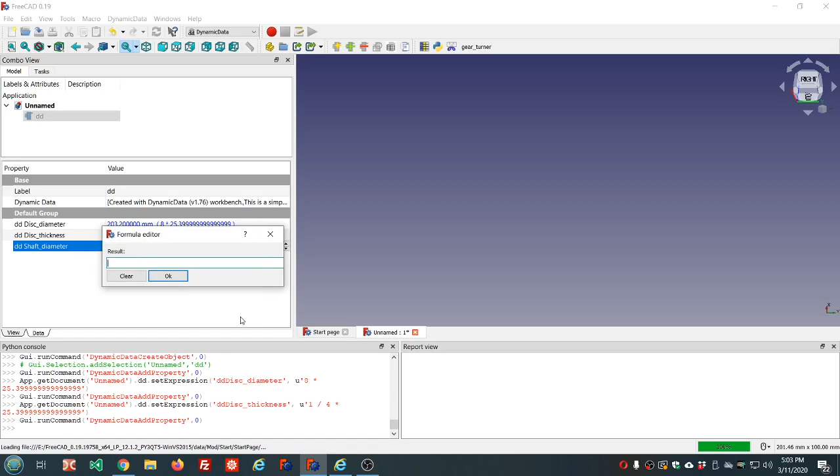So I'm going to call that the shaft diameter. That's another length type property. Let's just call that shaft diameter. And this will be, let's just use 1 inch for that.

Now we're going to go to Part Design. We can do this in different workbenches, but since I've been teaching Part Design here lately, we'll do it in Part Design. So I'm going to create a new sketch, which also creates a new body. We'll put it on the XY plane, and we'll draw some circles in it. The first circle is going to be the outer diameter, and we'll constrain that diameter. dd.dd, this diameter.

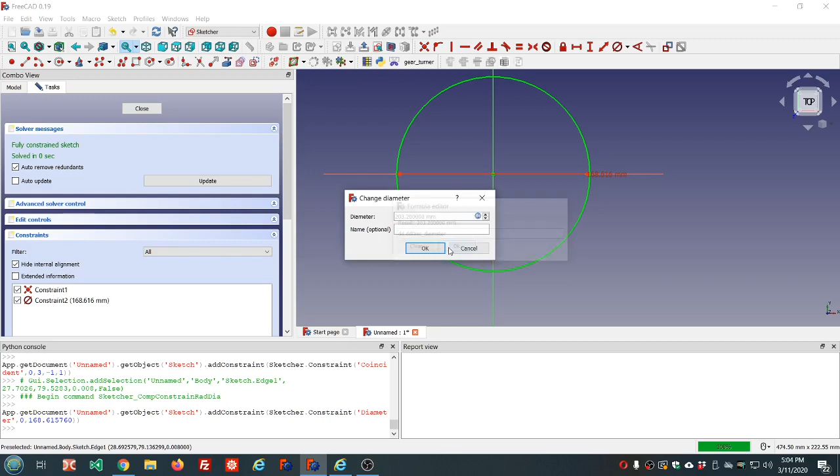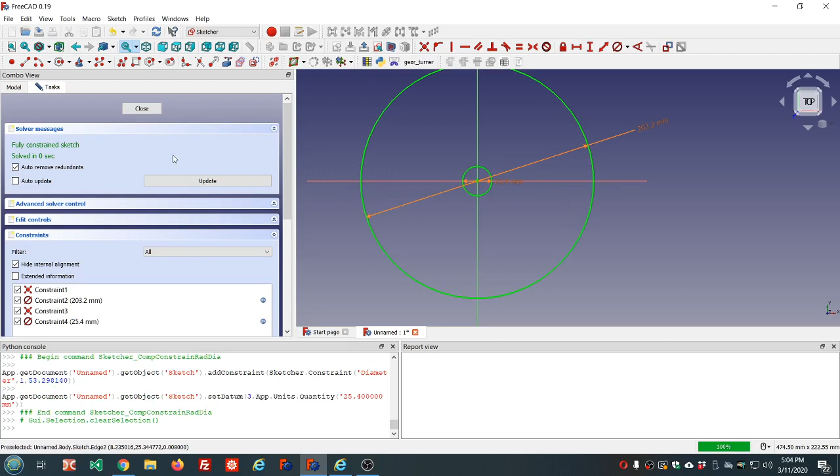Alright, and we need another hole for the shaft, a circle for the shaft, and this is going to be the shaft diameter. So that's the disc. And we're going to pad that to the disc thickness.

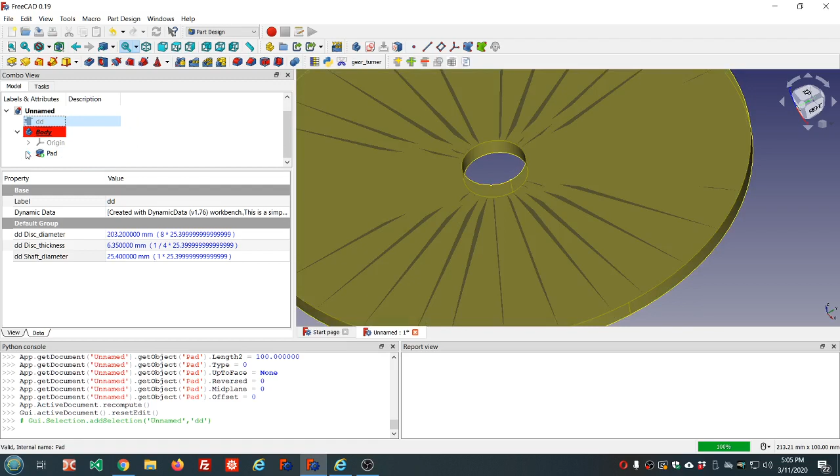So that's the basic outline of that disc. Your shaft diameter will probably be different, and you don't make any change to the sketch. Don't fool with that. Just make your change here. If you want a different shaft diameter, let's say you want 1.5 inches, let's put a parenthesis in here, 1 + 1/2, like that. And now watch this hole when I refresh here. So this is parametric.

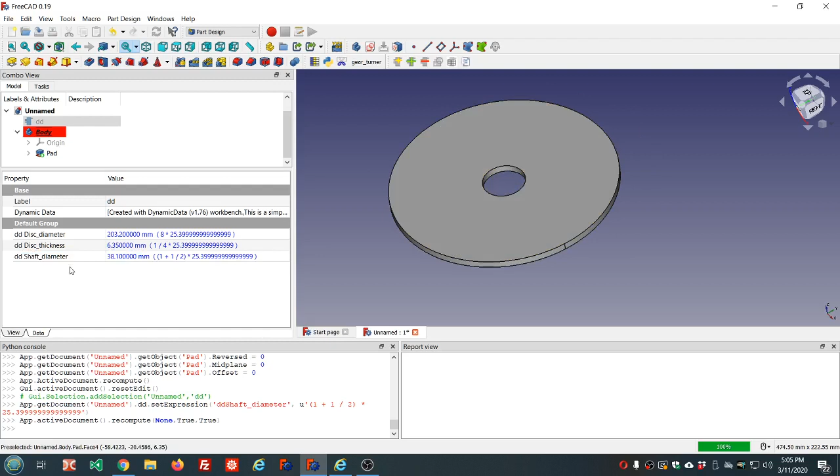Now we need also these mounting holes. Let's go back to these holes here. These holes are mounted to the rotary table. And we need to know how big those holes are, the radius. We need to know how many of them. Is it a 3-hole pattern or 4-hole pattern? And we need to know how far from the center will be the center of those holes.

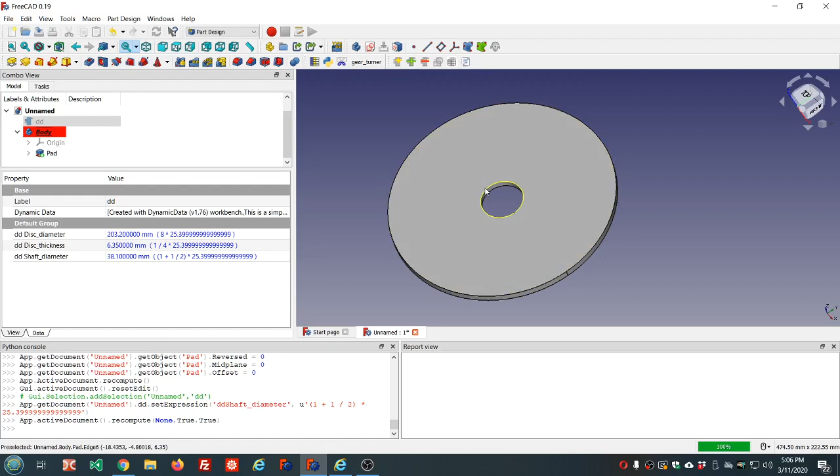So I'm going to call this the mounting holes, and the first one will be mounting hole diameter. That's the diameter of each mounting hole. Let's add another one. This is going to be a radius. We'll call this mounting ring radius. This is going to be the distance from the center to the center of one of those holes.

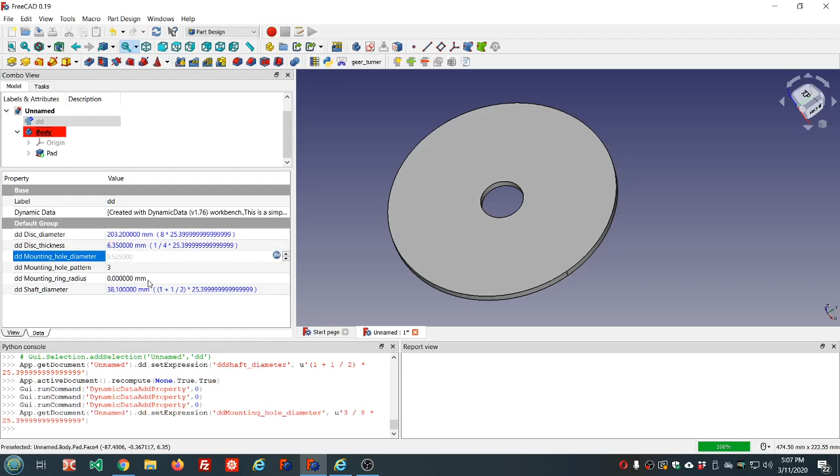And we need to know how many holes to make. So this is going to be an integer type property, and this will be mounting hole pattern, which is going to be 3, but it could be 4. You could change it here. So mounting hole diameter, I'm going to make these what seems reasonable, 3/8 inch. And the ring radius, I'm going to put that at 2 inches. We'll see what it looks like, and we'll adjust it to make it kind of look close to what we need.

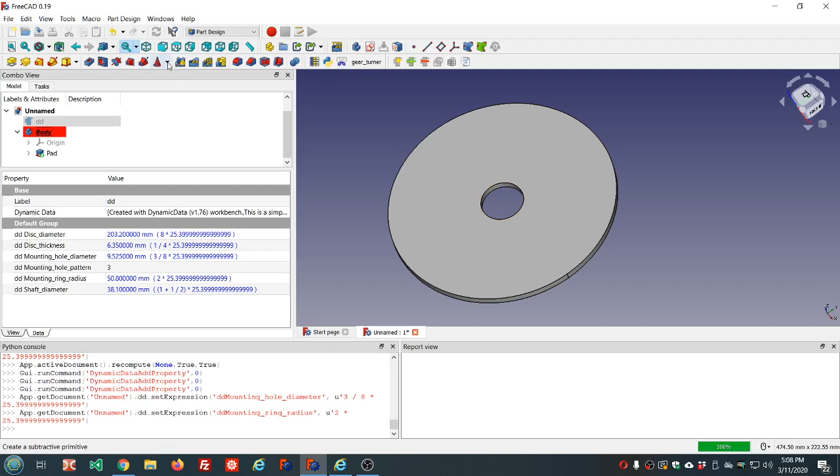So let's go ahead now, and we're not going to counterbore them just yet. We're going to go ahead and make these holes first. So we'll use a subtractive cylinder for that. The red denotes where that cylinder is at currently, and we're going to attach that to the XY plane. See that? And we're going to move it in the X direction by, what do we call this? The mounting ring radius. It looks like 2 inches, a little bit too far, so we'll need to adjust that.

I don't have Mr. Pete's actual numbers that he used. And I don't have access to the expression engine. Notice we don't have the little round blue icon here. So I'm just going to accept these defaults and then change it in the properties. Click on it here in the tree. And we're going to choose the radius here. And what did we call that? Mounting hole diameter divided by 2, since that's a diameter and this is a radius entry here. We don't have diameter as an option here yet. We don't need it.

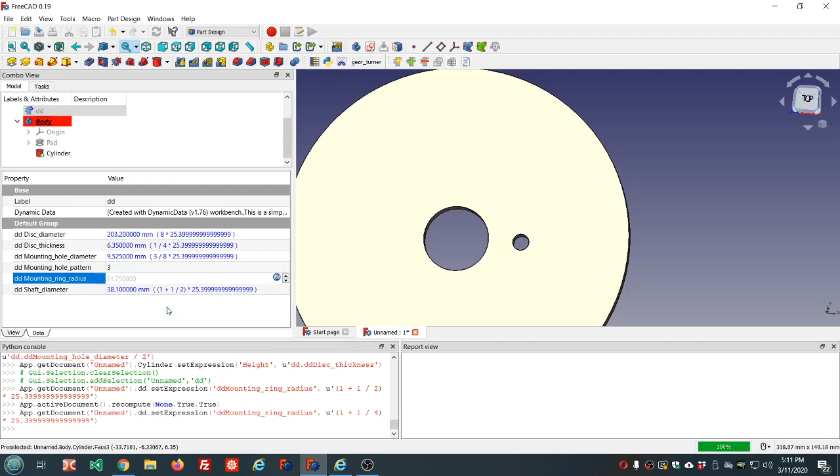So let's make that 1 + 1/2 and see what that looks like. And watch when I refresh. Is that a little bit better? Not quite there yet. One and a quarter maybe. Refresh that. Yeah, that looks good.

So now let's go ahead and create the hole pattern for this. Just select the cylinder and choose this, create a polar pattern feature. And this is going to be 3. But we want to reference this property and not just put 3 in here. That way, if we decide to change it later, if you need a 4-hole pattern on yours, you'll be able to come here and just change this to 4. So watch when I change that to 4. Now I have a 4-hole pattern. So we're going to put that at 3.

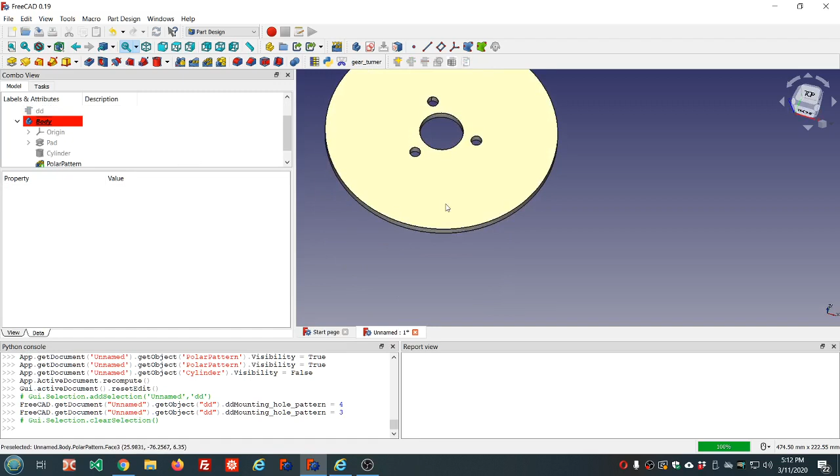So now we need to counterbore these. Now you might elect not to and just drill these and counterbore them yourself. Just put you some real small holes here as a pilot hole. But we are going to go ahead and counterbore them while we're at it. So what do we need to know about the counterbore? What are our variables that we're going to need for that?

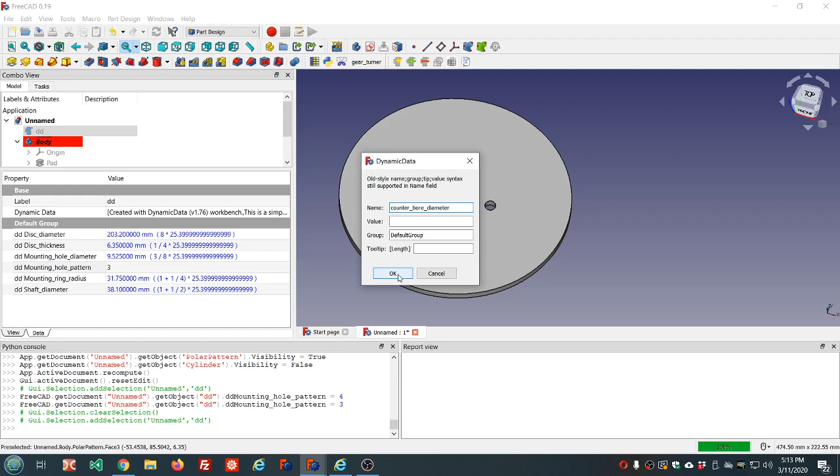Well, how big is the diameter of the counterbore? That's one thing we'll need to know. And that'll be a length property. And I'm going to call that counterbore diameter. So the counterbore diameter, in this particular case, we're using 3/8 inch holes. So I'm going to make this 5/8 inch.

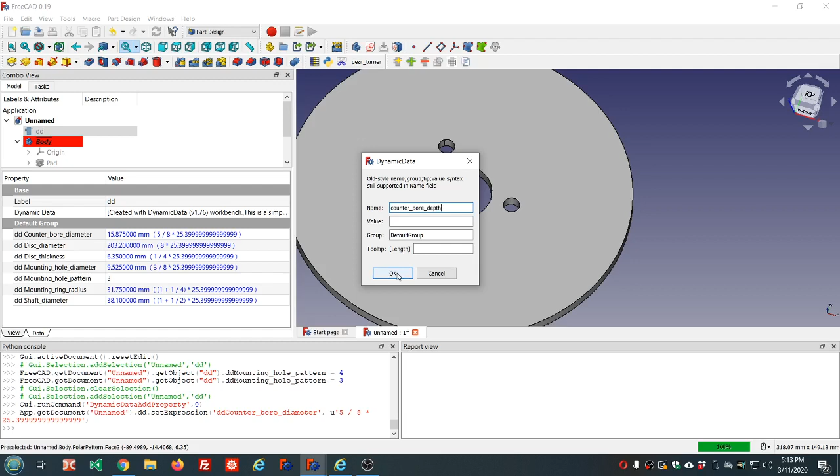Of course, it'll depend on what you need for yours. And how far down does the counterbore go? Does it go like halfway down? That seems reasonable. So we'll have another property, and I'm going to call that one counterbore depth. And that'll be this thickness. I'm going to divide that by 3, so we'll go 1/3 of the way down. That's how I'm going to do this.

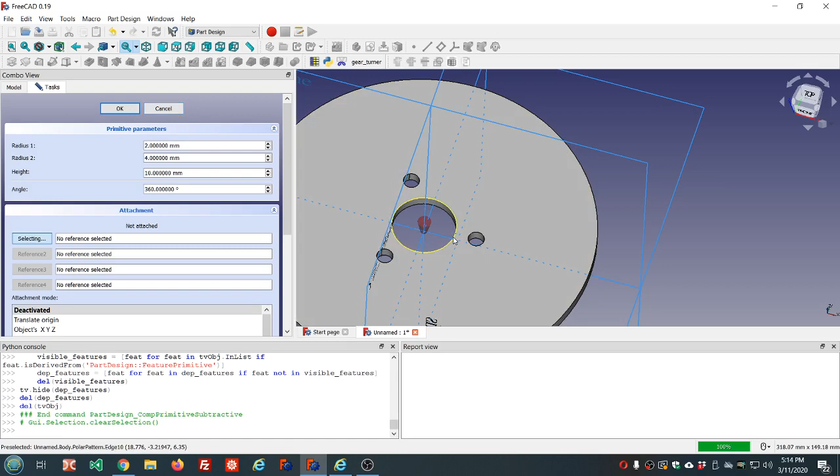Alright, and now we're ready to make that. And that's going to be a subtractive cone. And we're going to attach that cone to the circle here. And then we'll set the Z direction down. Notice it's right even with the top of here. So we're going to move it down in the Z direction by the amount of, what do we call that? Counterbore depth. And that's going to be a minus value, so let's multiply by -1. Up would pick it up higher, so we need to go negative to go down some.

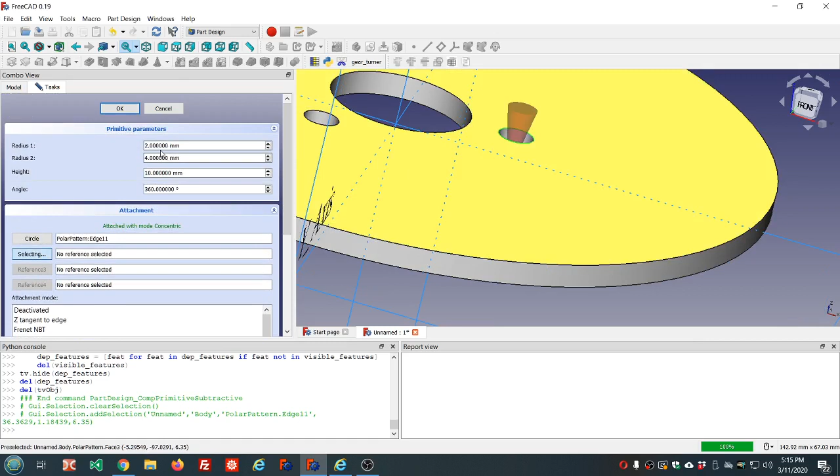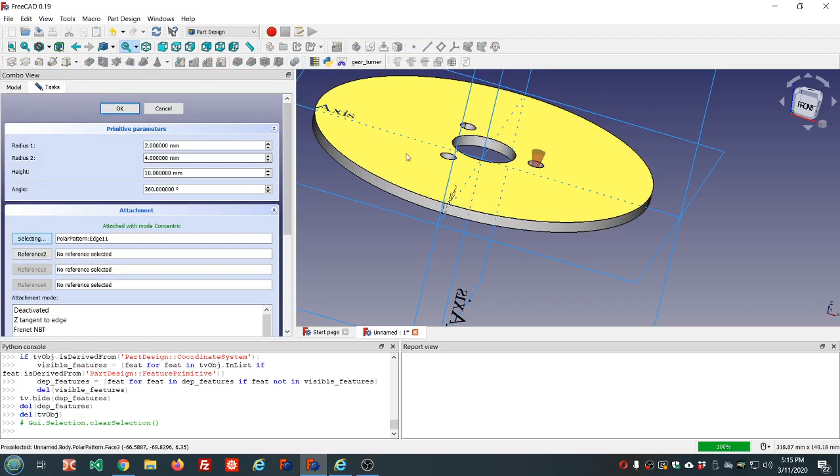And we'll set the radius in the other property, since we can't get to that expression engine from here. So I'll select the cone here, and radius 2 is the top of the cone. Remember, the cone was, let's double click on it, it's bigger at the top. So radius 2 is that bigger radius, and that's going to be the counterbore. Where we're at here, counterbore diameter divided by 2, since this is a radius field.

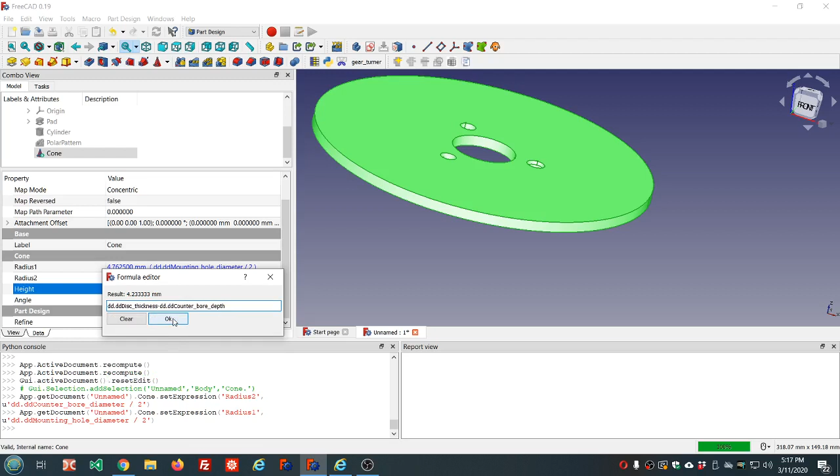And the height, well, let's set this other radius. This is going to be equal to the mounting hole diameter divided by 2. And the height is going to be this thickness minus how far down we moved it, which was the counterbore depth, right? Counterbore depth. So that should give us our counterbore.

If you wanted to go a little deeper or a little wider, this can be changed very easily. Counterbore depth: if you want to go halfway down instead of a third of the way down, you could divide by 2 here. Or you could specify exactly how far to go. So that looks pretty good. And now we need to make a polar pattern of this subtractive cone, and that'll be the same way we did a moment ago. And this will be also the mounting hole pattern. There we are.

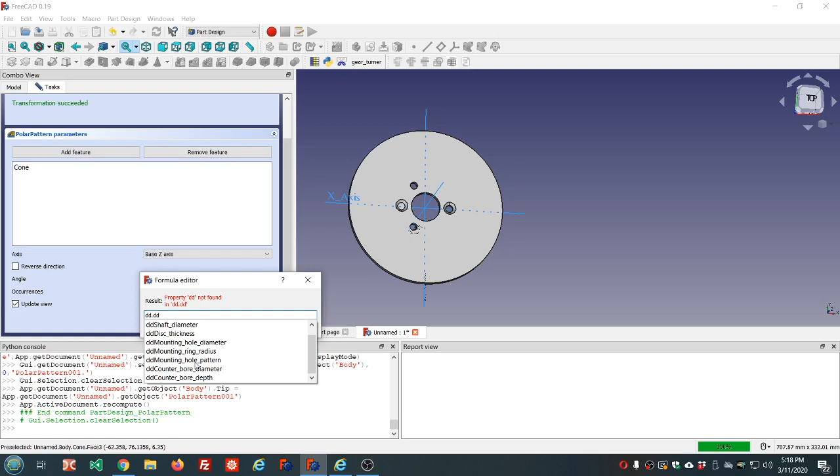So we've got our dividing head plate coming along quite nicely. And it's nice and parametric, so we can change any of these properties and get it exactly like we want. So if we wanted just 6 inches instead, very easily, come in here and change it to 6 inches. And then when we refresh, now we have a 6-inch dividing head plate. Now we're ready to begin adding our hole patterns around here. So let me go ahead and make this a little bit bigger. Back to where it was. We'll make an 8-inch wheel here.

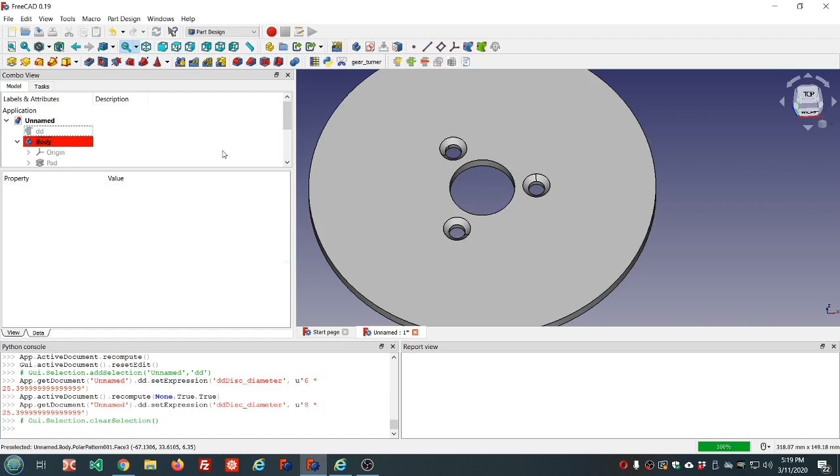Now the radius here, I'm going to call this a ring radius. Let's go ahead and make our first one. It doesn't really matter on these, but you can put it where you want it. So we're going to need a ring radius value, how far to start that hole, how big will those holes be, and we need to know how many holes in that first ring pattern. And we'll put, I don't know how many yet. Let's see how many he had on his. 1, 2, 3, 4, 5, 6. Let's see if we can put 6 on here.

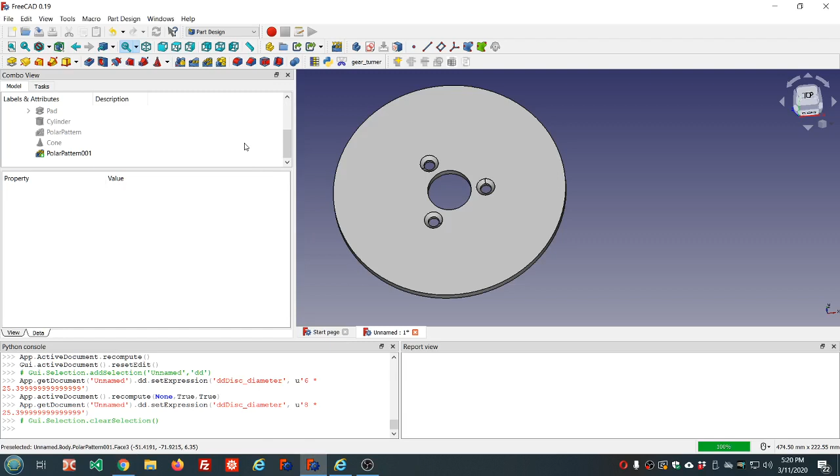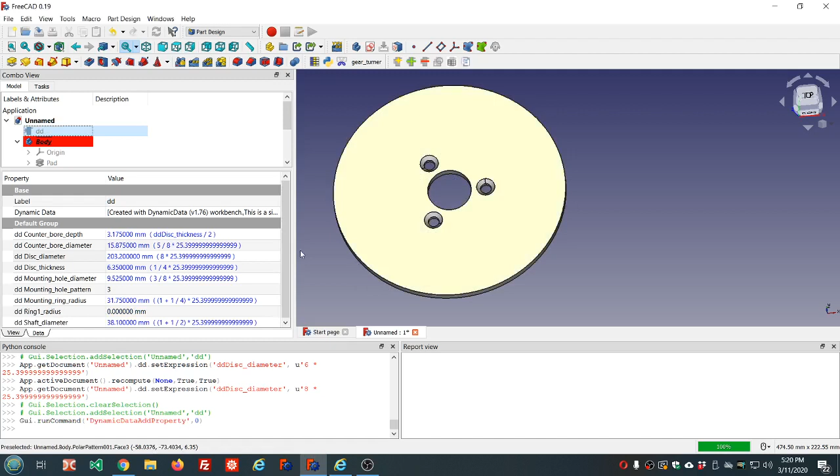Let's begin with the first one. So let's select our DD object and add another property. And the first one, I'm going to call this ring 1 radius. This will be the first ring. And let's add another property. And this will be, we're going to call this small hole diameter. Small hole diameter, and readjust these here to give us a little more room down here. That's going to be how big those small holes are, and I'm going to make that 1/8 of an inch.

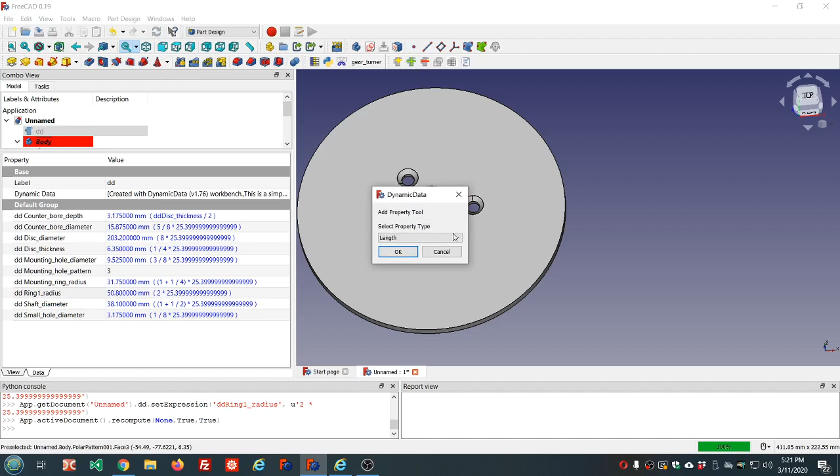And this first ring radius is going to be, let's start that at 2 inches. We'll see what that looks like. And we need to know how many holes, what's this hole pattern going to be for ring 1. So ring 1 hole pattern is what we'll call that. And that'll be an integer value. So ring 1 hole pattern.

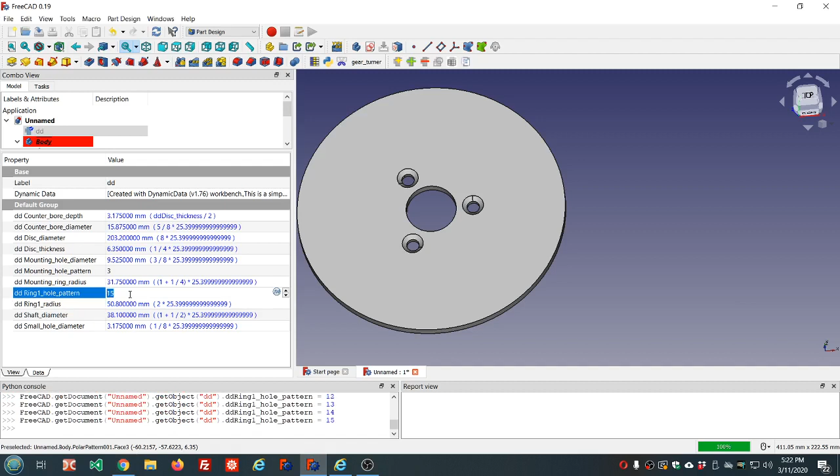Have here? I don't remember. This finger's in the way. We'll just make it 15. We'll start with 15. And I can just roll my mouse wheel forward and get to 15. Alright, let's go ahead and set up that hole pattern.

We need to drill a hole first, don't we? So that'll be with another subtractive cylinder. And we will put it on the XY plane. And we'll move it in the X direction. How far? I don't remember what I called this. Ring 1 radius, wasn't it? Okay. So that'll be where it's at. Looks about right. It's going to need to be a little smaller.

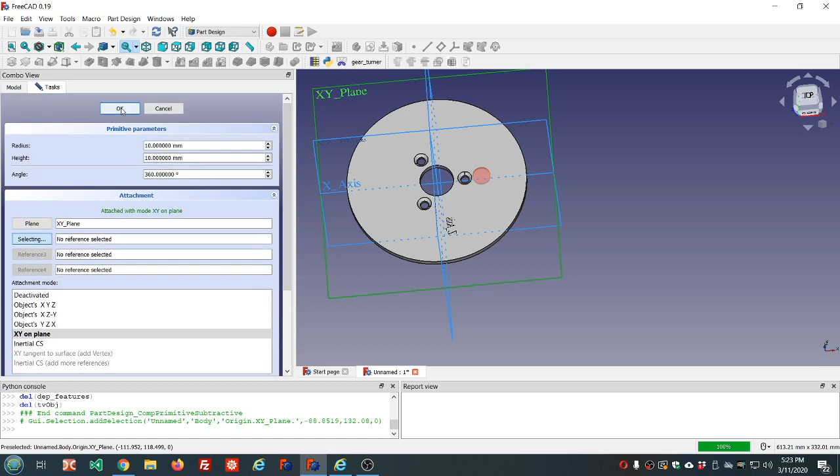And we'll set that in a moment here. Click on the cylinder. And we'll set that radius to small hole radius. Small hole diameter divided by 2. Alright. That looks okay. Let me reference that video again. Looks about right.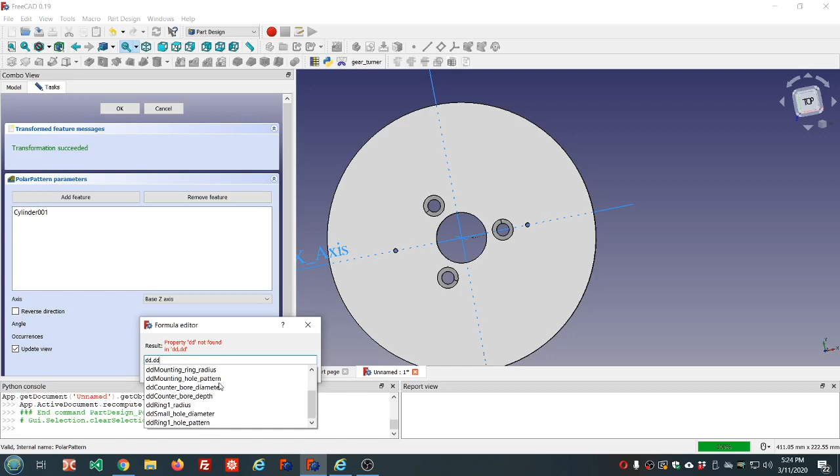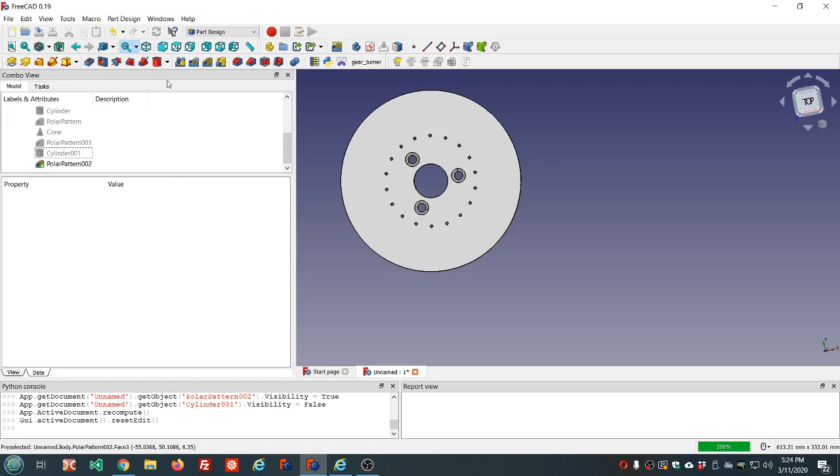And now we need to polar array this subtractive cylinder. And that's going to be ring 1 hole pattern. Alright. So that's our first hole pattern, our first ring pattern. And now the second one. Add another cylinder. Attach it to the XY plane again.

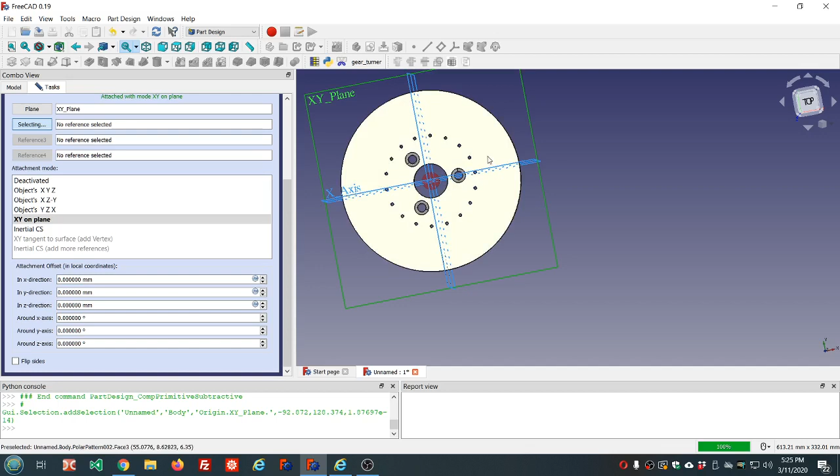And we need to move it. We don't know where to move it yet. We don't have a... I'm trying to think, should we just make a variable and so it'll be bigger than the one before? And the variable will be how much bigger will the second ring be compared to the first. I think that's going to be the way to do this. So we'll say okay for that, just for now.

And we need to add our properties. So I'm kind of making this up as I go along here. So this is going to be, let's call this ring separation. So this is the radial distance from one ring to the next. And our holes are 1/8 inch. So we can make this, let's try 1/4 inch. I'm just going to leave it at 0 here. And let's set that up at 1/4 inch. We can come back and change this if it doesn't look right on the screen.

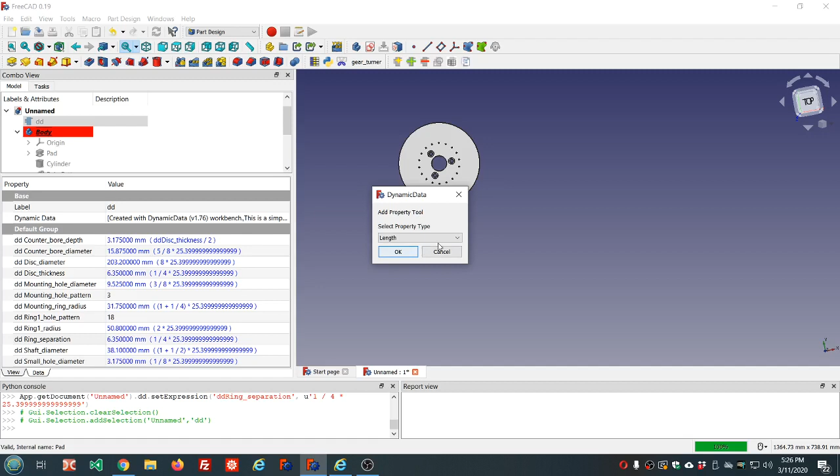Alright, now one more property that we're going to need is the ring 2 hole pattern. So let's add that. And that'll be another integer value. Ring 2 hole pattern. Try to give these nice descriptive names. And I'll make that one 19. But it does not have to be one more than the one before. It could be some other value.

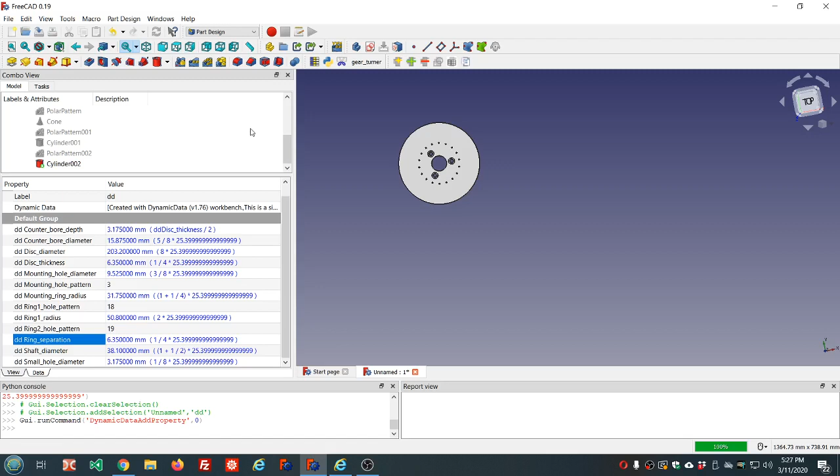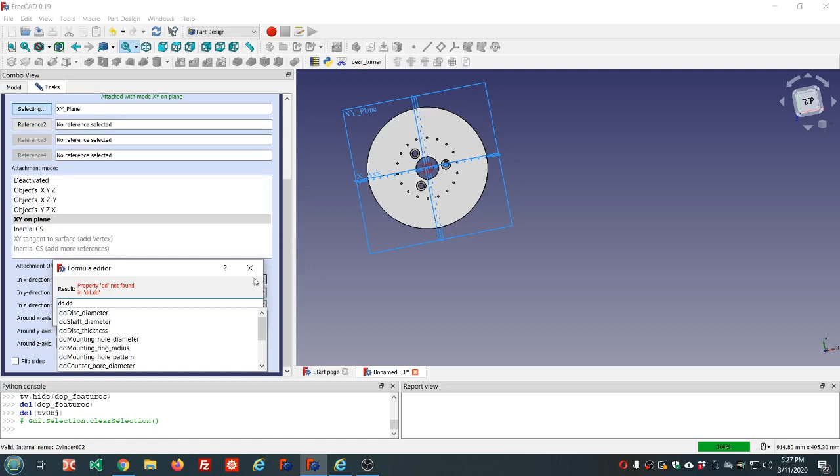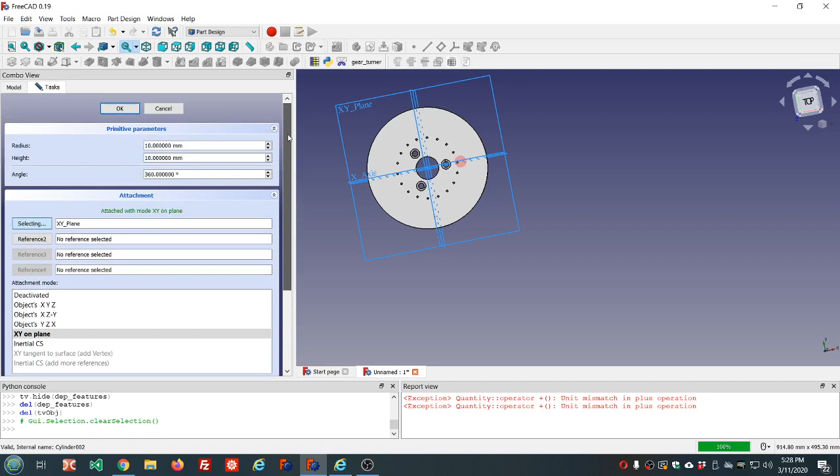Alright, and now let's see. We didn't move that one out yet. We didn't know how far to move it yet. So this is going to be ring 1 radius plus ring separation. And say OK. And of course that's way too big.

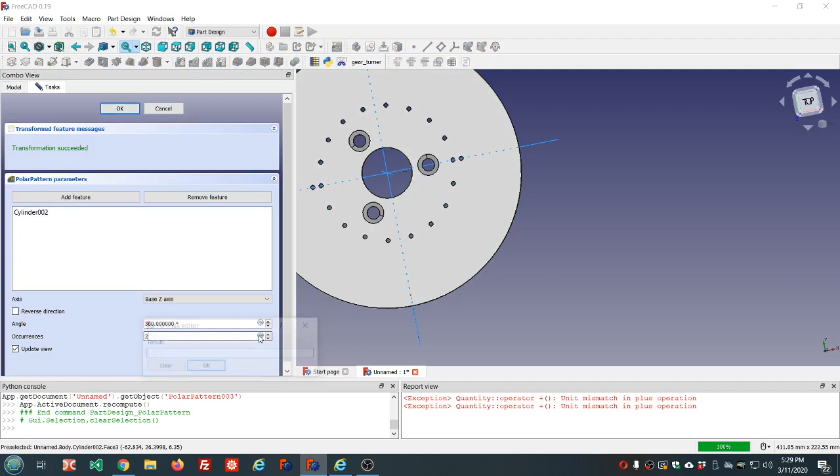We'll set this radius to, what do we call that, small hole diameter divided by 2. Yeah, that seems about right, doesn't it? The same separation. We might be a little bit more, but I think that's going to be okay. Now let's go ahead and make that polar array here. Ring 2 hole pattern. Alright. And that one has 19 in it.

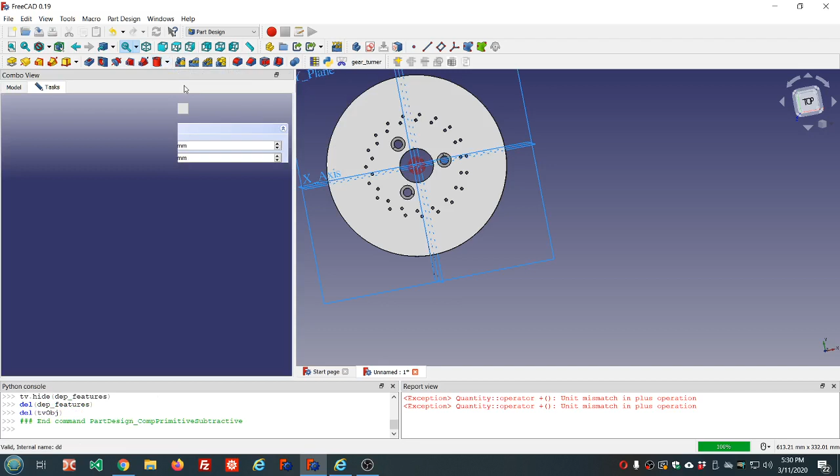And let's make another one. Well, first let's create our variable here. Click on the dd object. And this will be ring 3 hole pattern. And that was going to have 20. And now add another subtractive cylinder for that third ring. And we're going to map it to this XY plane again.

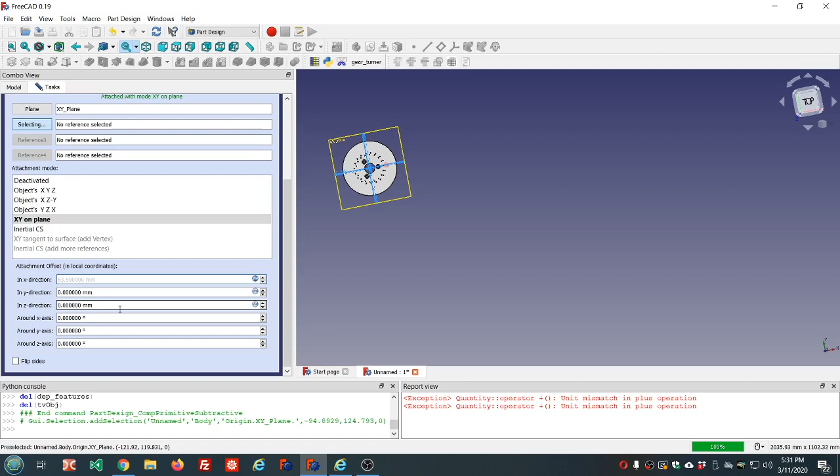And we'll move it in the X direction by ring 1 radius plus, what do we call that? Ring separation times 2, right? Because this is the third ring. And we'll set that radius here in the properties.

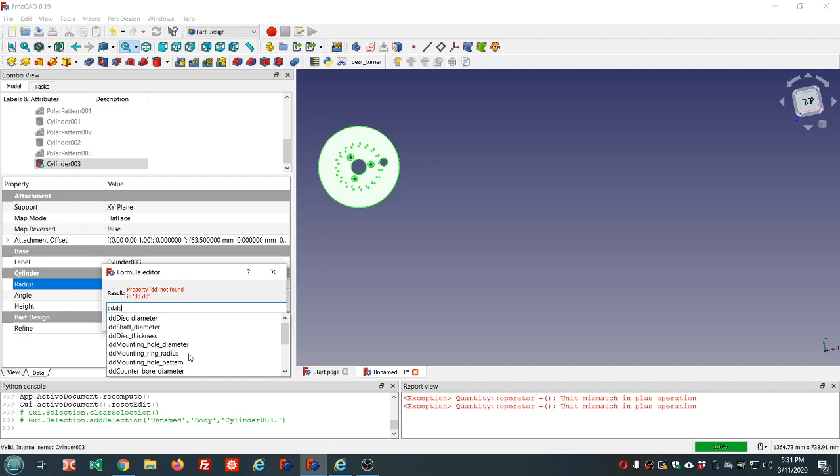And it's that small hole. What do we call that? Small hole something or other. Small hole diameter. There it is. And the height is this thickness. We didn't set the height on that one. Go ahead and set that. I thought about it when I set that height. And cylinder, this one we didn't either. So that could be a bad thing if we change this thickness. The holes won't go all the way through if it's too thick. So now we've got that set.

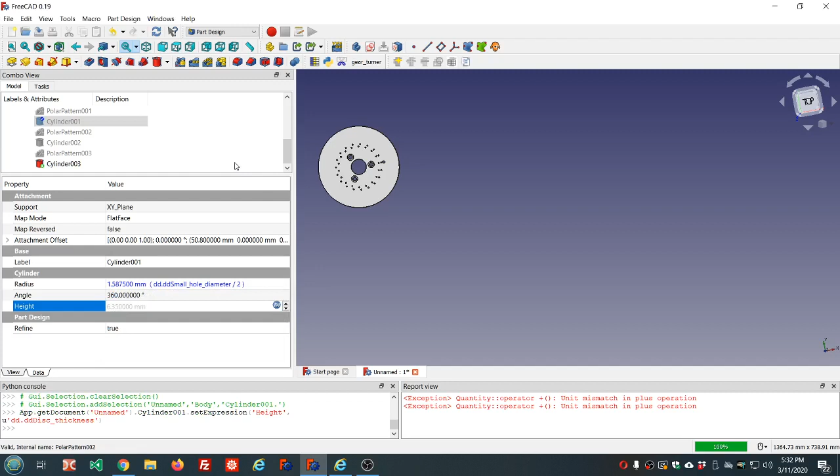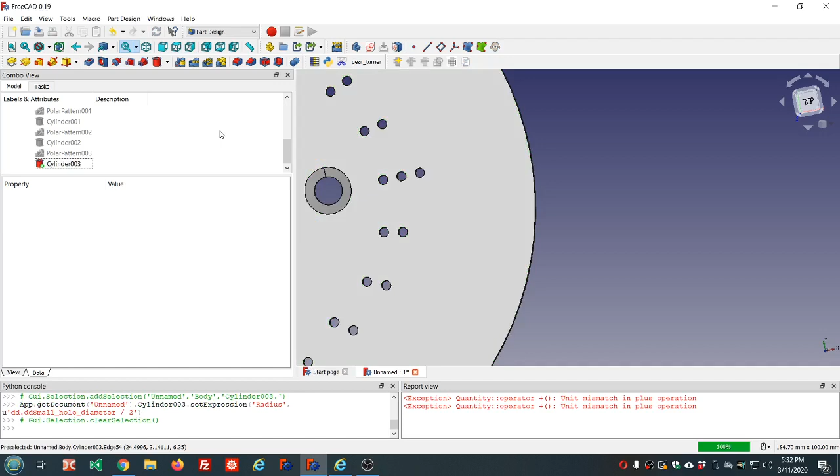And I made a mistake there, didn't I? This is a radius property, not a diameter. So we need to divide that by 2. It's okay, we all make mistakes, and I am forgiving of my own mistakes. So this will have 20 in ring 3. So we'll make another polar pattern feature. And this will be ring 3 hole pattern. There it is.

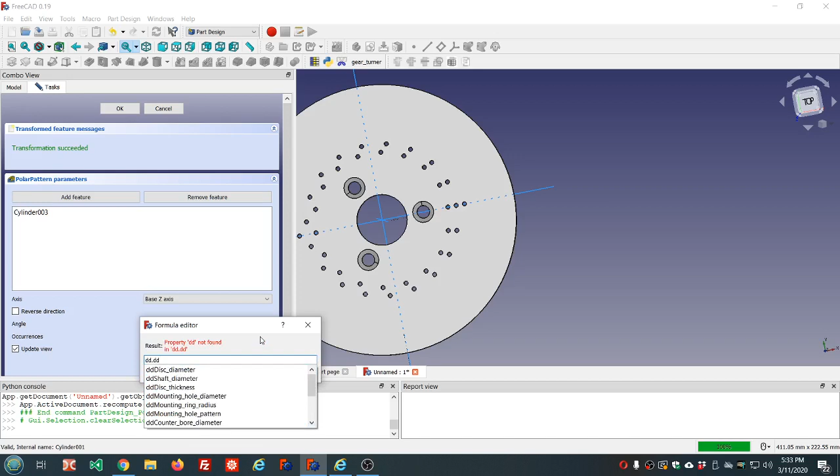Give it a moment. We're coming right along. We need 3 more rings. Let's select our dd object. There'll be another integer, and it's going to be ring 4 hole pattern. It's important to give these long descriptive names because you can see how many we have here.

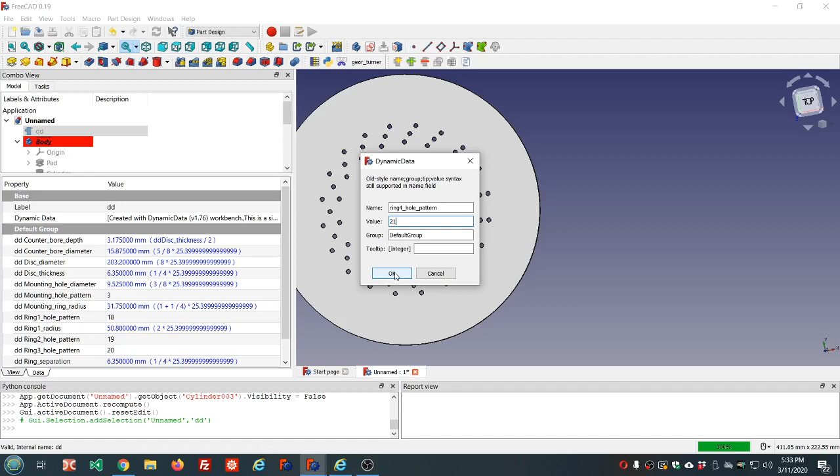Now we could have created separate groups. Instead of all in one default group, we could have mounting hole group, ring 1 group, and so on. So this is going to be, there it is, ring 4 hole pattern 21. So let's add another subtractive cylinder. Attach to the XY plane and move in the X direction.

Ring 1 radius plus ring hole separation, ring separation, what do we call that? Ring separation times 3 here, isn't it? Let's see where that puts it. Yeah, times 3 for ring 4. And we'll say OK. And that hole is way too big, but that's okay, we'll fix it.

Small hole diameter divided by 2. Refresh. Alright, and don't forget to do the height here. This thickness. And now we're ready to add another polar pattern feature. And the number here is a ring 4 hole pattern.

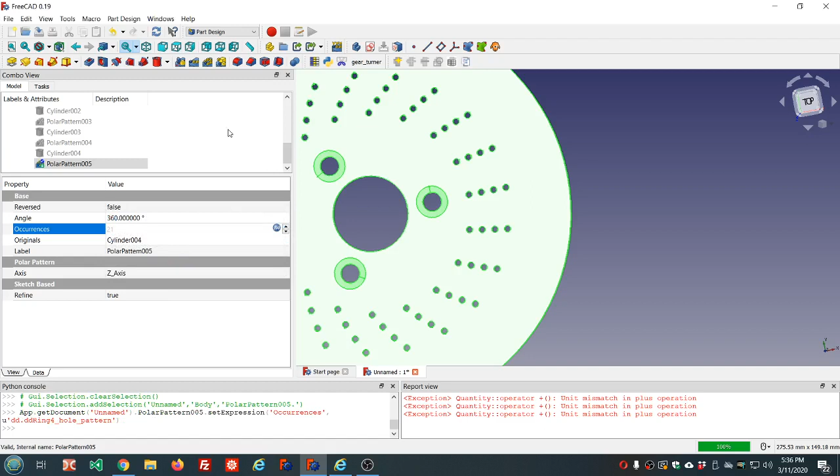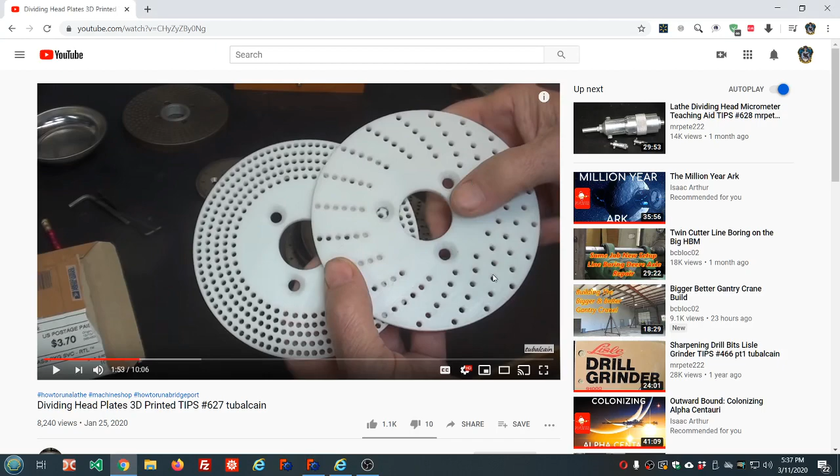Clear these arrows out in case we get another. It'll catch our attention. So this is looking a lot like that one, isn't it? You see how these patterns are all lined up here, and then change a lot. These are doing the same sort of thing here. So we've got 4 hole patterns, and we need 6 we're going to make for this. And you see how I'm doing it. So if you wanted to add more, it's not that difficult.

Now this Dynamic Data tool here, it has to be installed separately from FreeCAD. So if you download and install FreeCAD, you go to the Tools menu here, look for Add-on Manager, and you'll be in the Workbenches tab, and just look for Dynamic Data. They're alphabetical. Click on it and click Install. So that's how you would install this add-on.

And let's see what we need. We need a ring 5 hole pattern variable. So we select our DD object, the plus icon. This is another integer. This is ring 5 hole pattern. It's going to be 22.

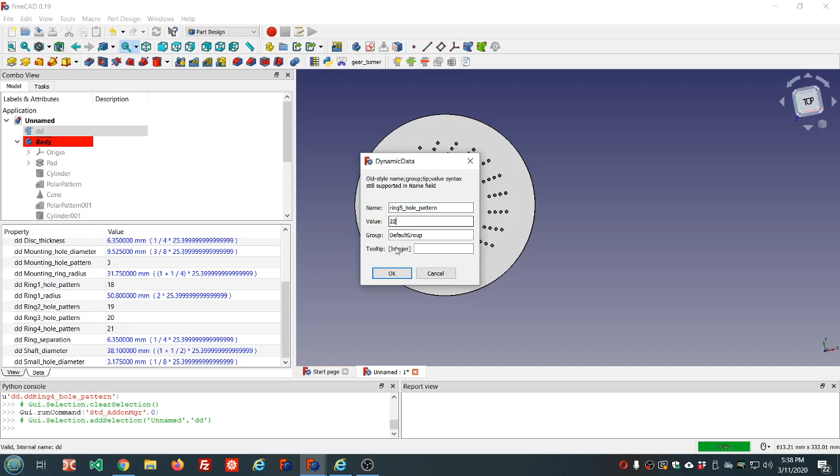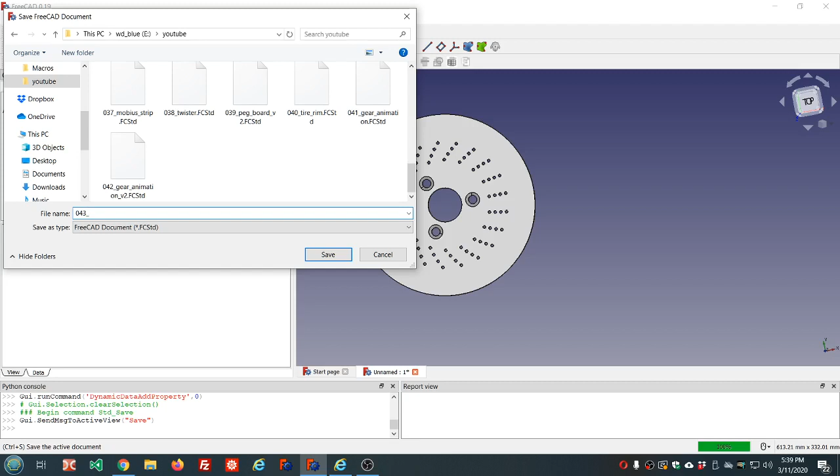I better save this file right now. Should have saved it earlier already. Put it in YouTube with the other files. This is going to be 043_dividing head plate. Because if FreeCAD crashes and I lose all this work, I'm not going to be a happy camper.

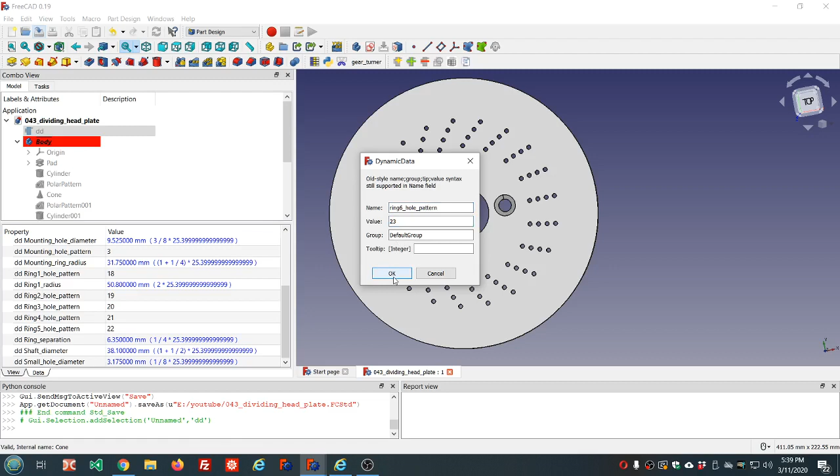Alright, so we've got DD ring 5 hole pattern. Let's go ahead and make the 6 hole pattern as well. And this will be ring 6 hole pattern. This one's going to have 23. And of course you can adjust these. It's going to take a little while to refresh these part design arrays; they are not optimized for efficiency.

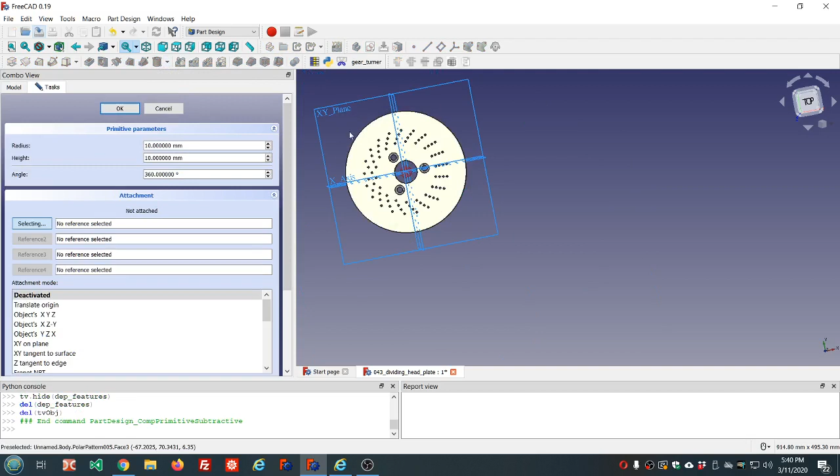So let's add another subtractive cylinder, map it to the XY plane, and move it. Ring, what do we call this? Ring 1 radius plus ring hole separation times 4. Okay, and now that hole's too big, and it's a small hole diameter divided by 2. Alright, and the height. Let's not forget the height.

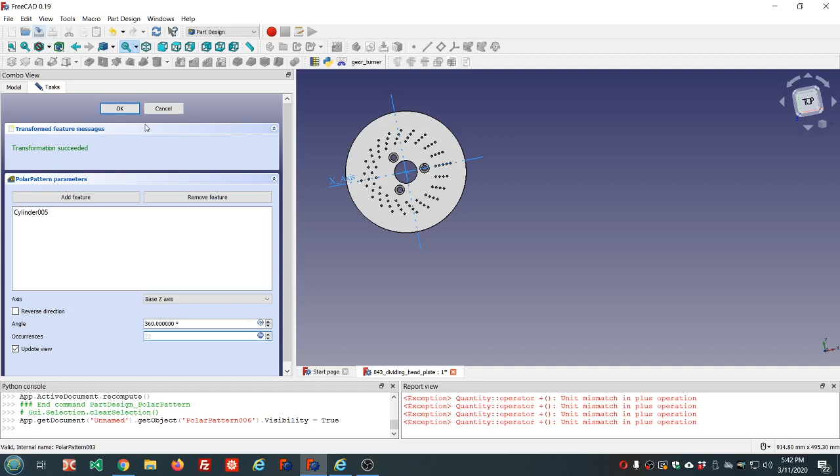Now let's go ahead and make this pattern. This is ring 5 hole pattern. Give it a moment. Here we are. And now what's the next step? Alright. This one will be at ring radius. Where's that at? Ring 1. Ring 1 radius. There we are.

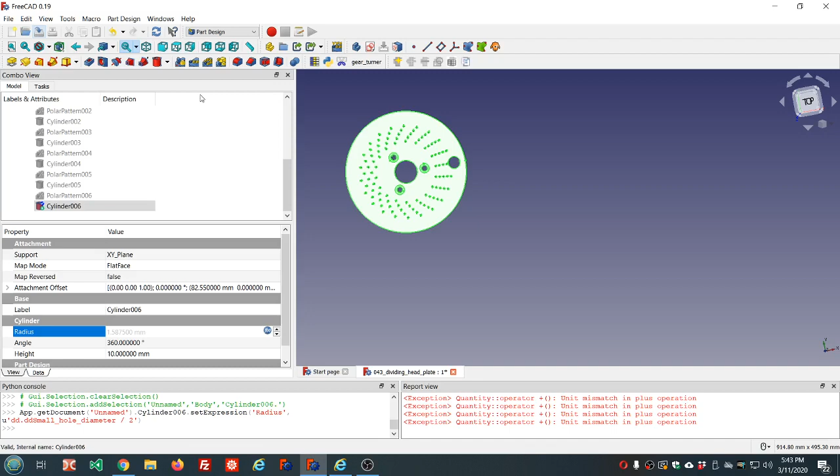Plus that separation times 5, because this is ring 6, and we'll say OK, and that hole's too big, and that's going to be the small hole diameter divided by 2. Almost finished. Let's refresh that. Yep, looking good there. And now another polar pattern feature. I forgot the height. We'll have to go back and add that.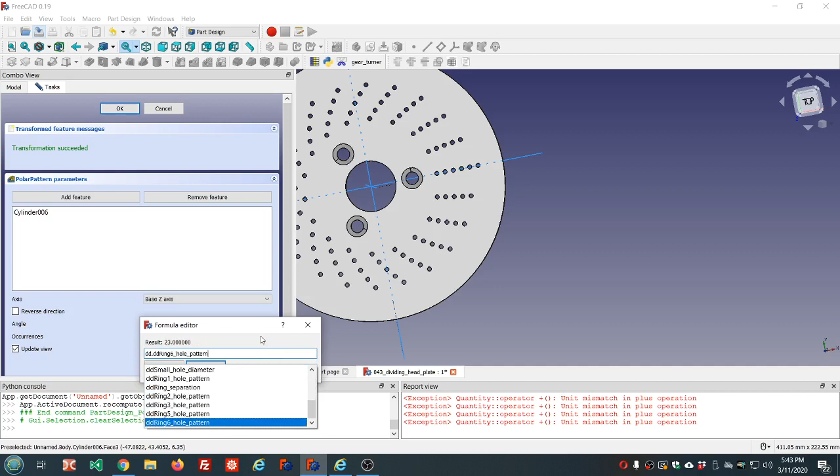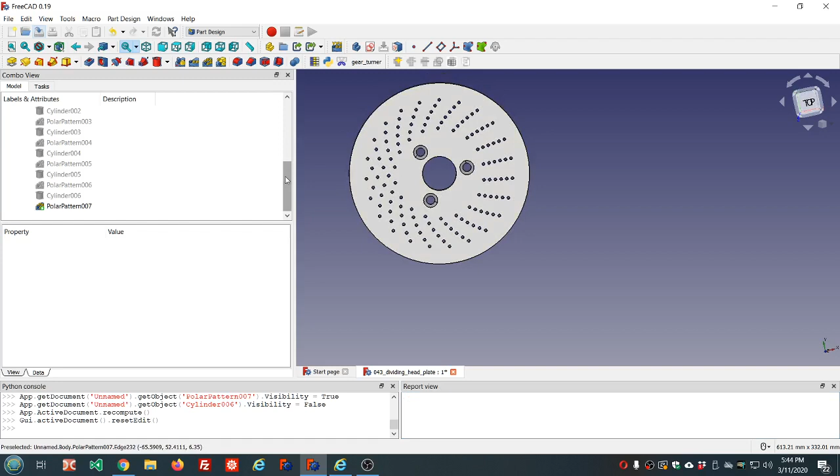And this is ring 6 hole pattern. And let it make a preview for us. Alright. So that's it. The advantage of using that ring separation now is it's much easier if we want to make a little more separation, since we have room. And like I said, it doesn't really matter the radius of these, as long as your little peg holder thing can reach it.

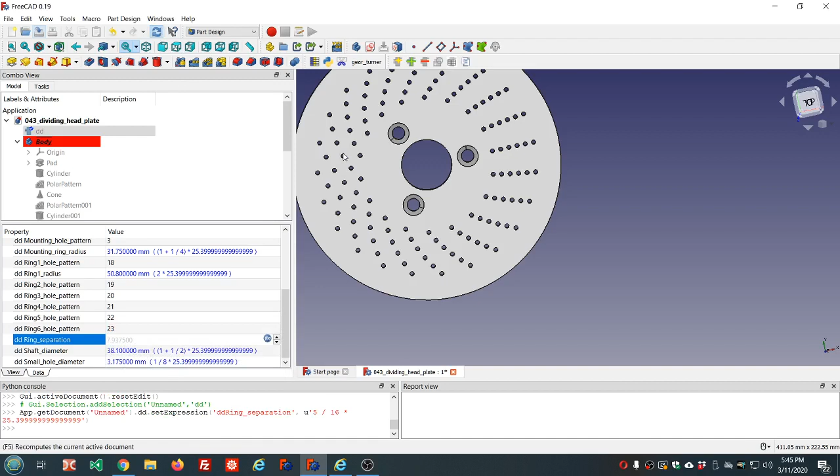So we can move our separation. Where's that ring separation? Instead of a 1/4 inch, we can make it 5/16. And let's see what happens when we do that. I'm gonna refresh. It'll take a little while. But watch these holes. Keep your eye on the prize.

You gotta be patient with FreeCAD. Sometimes you think it crashed, but it didn't. It's just taking its time. So when you make these adjustments to your DD properties, be patient.

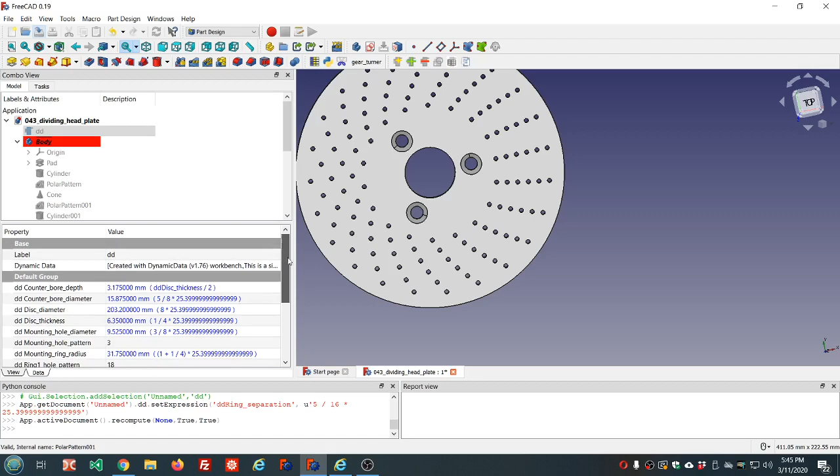I had a visitor, so I had to pause.

So this is our parametric dividing head plate, and you can see how to modify it.

And yet another visitor. So where was I at?

We see how to modify these properties. Now if you don't want a particular ring, so you don't want ring 6. I haven't tried this yet. This is live TV. You can set this to 0, I believe. And let's see if ring 6 disappears, or if it gives us an error of some sort.

Yep. It does not allow a 0 hole pattern. So I guess you're just going to be stuck with that. Now another error you might end up with is if it goes beyond the edge, that's going to be another error because of this workbench that we use, Part Design. Had we done this in another workbench, you would not have that problem to contend with.

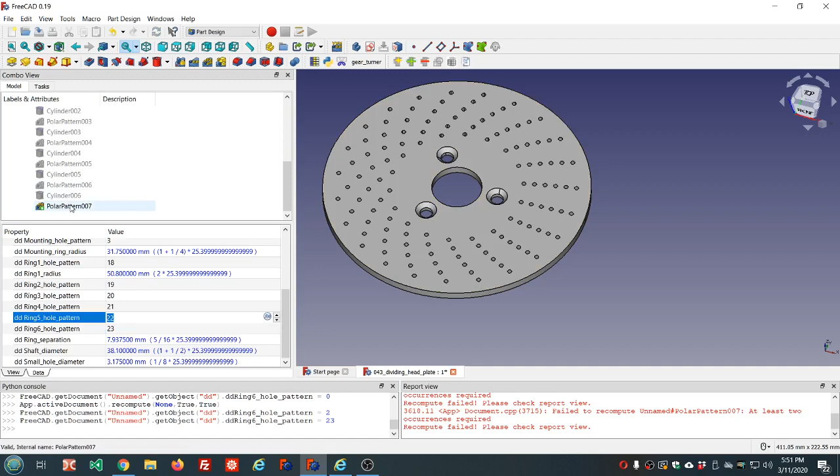So you're going to have to make 6 rings unless you come in here and delete these. You start at the bottom. I don't want to delete it. Let me save this file. But I will. I'll delete it just to show you. So this is ring 6. If we delete it, it disappears, and then we can delete this cylinder 6. So that's how you can just have 5 rings.

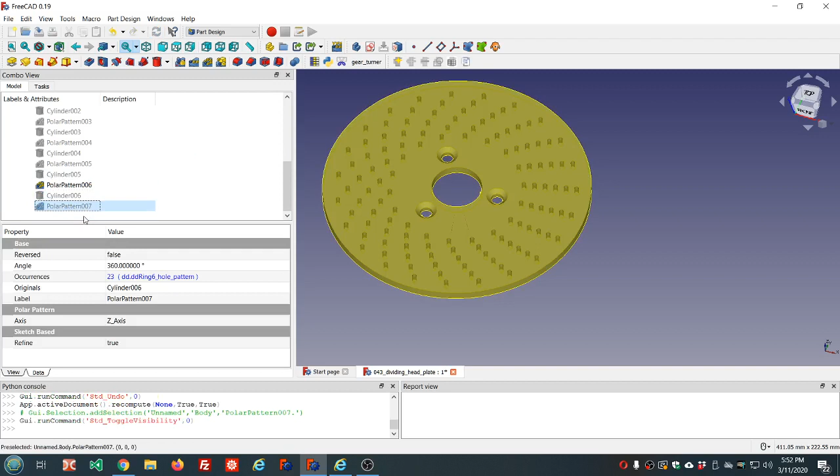Now I'm going to use the undo feature to undo that delete and undo again to put it back in there, and then refresh. And I'll make this visible again. Now, if you want to add more rings, you saw how I did it. Just do it the same way. You add another cylinder, move it. You saw all that several times.

If you want to print this on your 3D printer, what you need to do is select the body object. Don't select this last pattern. Select the body. Go to the File menu. Choose Export. And you can choose the STL format. Most slicers will have that. And I'll include that also. But yours is going to be different, no doubt. I mean, these are not going to be the right dimensions.

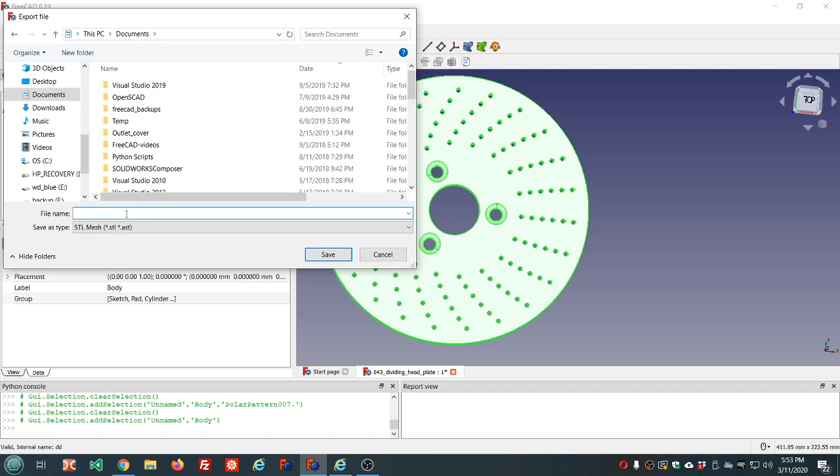But let me just put it in my documents folder. I'm going to call it dividing head. And now when I pull this up, it shows up here. And I'll just double click it. And I'm going to choose Cura. Let's always open STL with Cura.

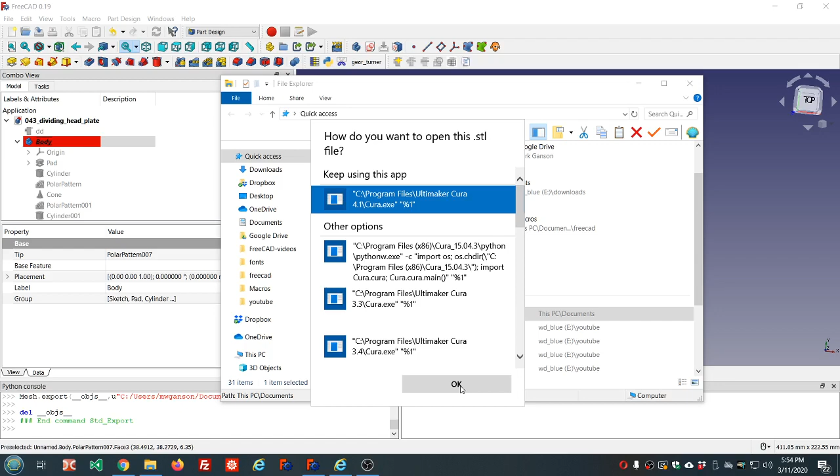Oh, that's Windows for you, isn't it? Let me just get Cura running. Hang on a second.

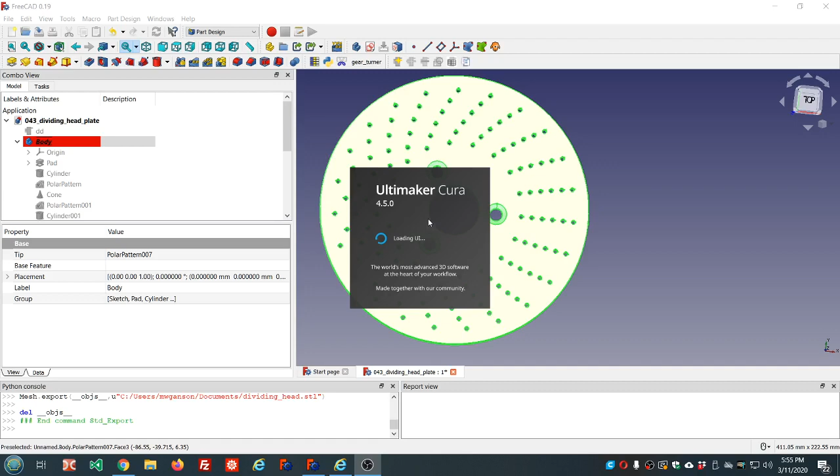So I've got Cura, Ultimaker Cura 4.5. Another common slicer is called Slic3r, which I don't have installed. I'm just using Cura. So we open up Cura. Eventually it'll finish loading. Alright, and then we'll open the file. And I put it in my documents. And that is sorted by date, so dividing head STL.

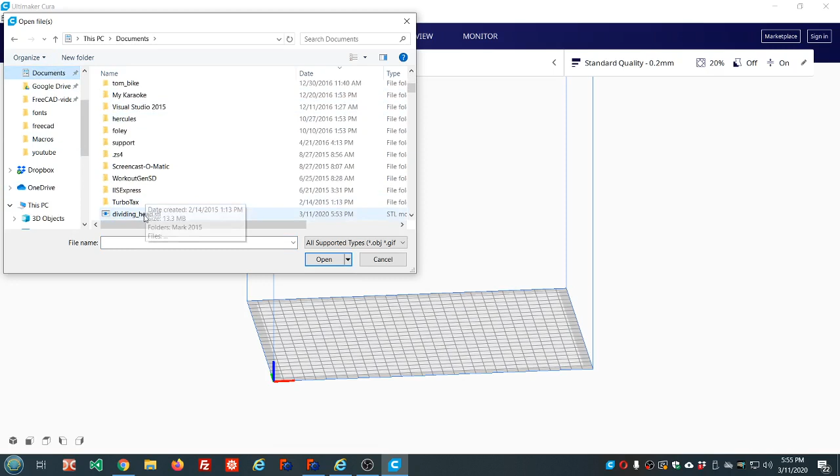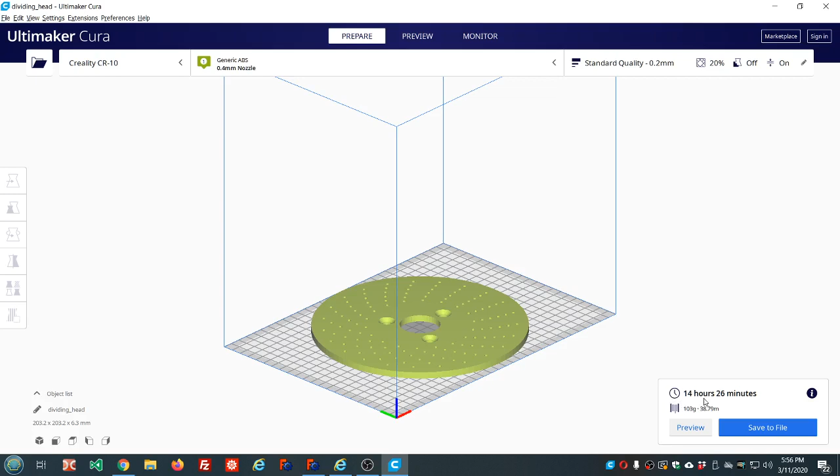Ooh, boy, it's almost too big for my printer. I've got a CR10 Mini. Almost too big for mine. This is an 8-inch wheel. And then you would slice it, of course. I'm not going to teach you how to use your slicer because I'm sure you've used it many times. And this particular wheel would take 14 hours to print on my device.

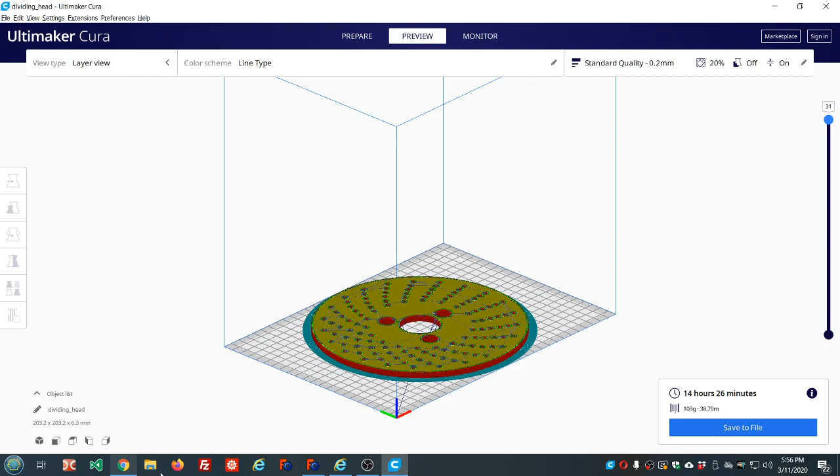And here's a preview of each layer as it's printed. I'm using standard quality and I have a 0.4 millimeter nozzle on my printer. So anyway, that's how you would export your model into STL format. Sometimes I use AMF format, sometimes Wavefront OBJ. All three of those work well with Cura.